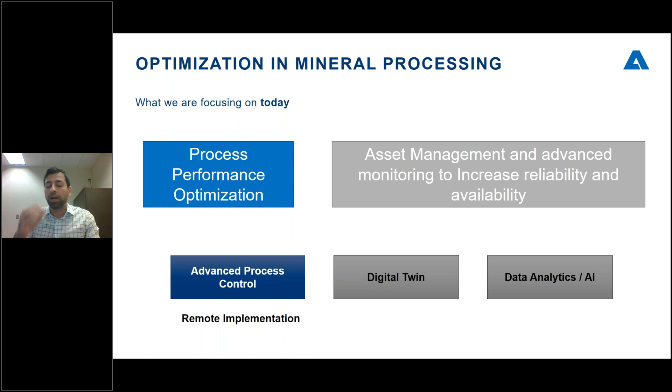Okay, so let's start with talking about our friend, the PID controller. I'm sure most of us have heard of the proportional integral derivative controller. It's everywhere, and rightfully so, because it's free, it's very easy to tune, very easy to understand and very predictable in how it behaves. So no surprises. And that's great.

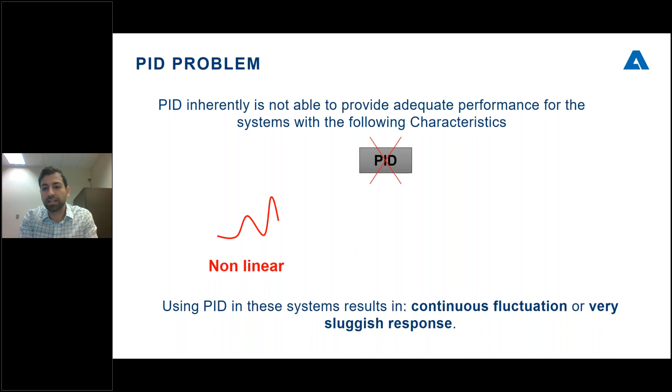But the problem with PID controllers is that on specific processes, there are inherent limitations. When the process is nonlinear, like thickener operation, for example. Or when there are multivariable problems, where control variables have influence on different process variables. For example, in SAG mill control, we have the feed coming in, the water, the particle size distribution having effect, and the speed of the SAG mill having effect on the weight of the SAG mill and on the throughput.

And also when there are big time delays, let's go back to our example on the thickener. When we change the underflow for the thickener and we increase the flow, then the density will decrease with a time delay, same as in the SAG mill feed. So when there are places like that, then we have a problem with the PID. And the problem is that when there is lag, the PID controller cannot inherently provide the optimum response.

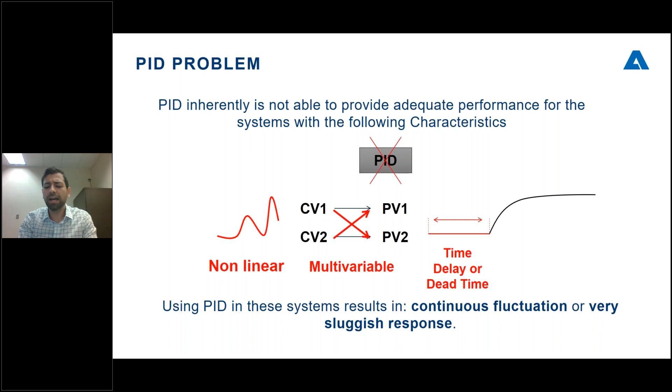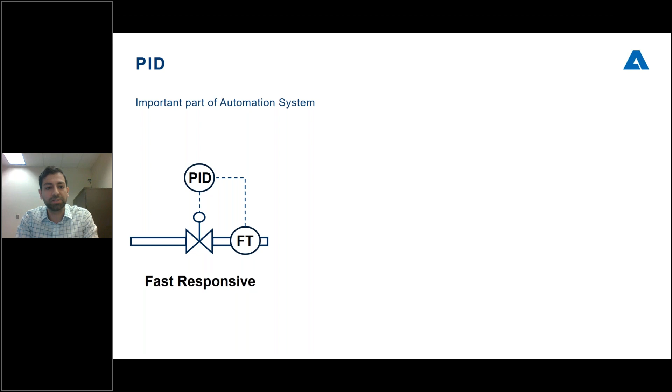Now, I never said that we just get rid of all the PIDs and have a different solution. There are places where a PID is perfect. For example, there are fast response loops like flow control, or places where regulation is not important, like when you have a buffer tank, or places where fluctuation is not important, when you have an analyzer for your pH and you have a mixing tank there.

So the places where fluctuation is important, and where there are inherent time delays or nonlinearity, those are the places where we need to have an alternative. And that alternative is the model predictive controller.

Now, the problem with the expert systems that you have heard a lot about through the last 30 years, that are available in the market, is that if you still have the PID controllers controlling those specific loops that are not suitable for PID control, and then you have a layer on top which does the optimization, at the end of the day you will end up with that fluctuation. You can't get away from it.

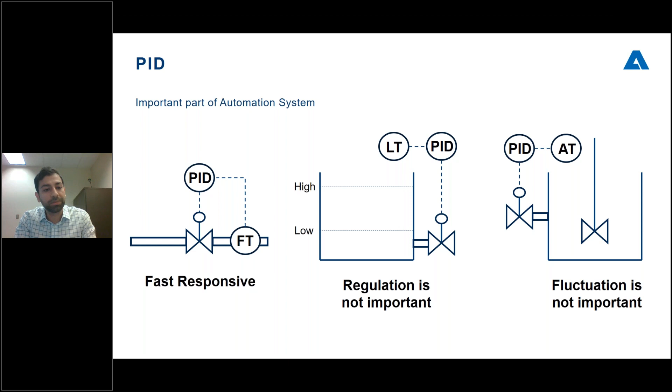And what happens is that the top layer for the logic, expert logics and all that, becomes more and more complicated because they are trying to go around the problem with the PID. And I will have examples for you later on.

So what we are proposing here is actually a hybrid approach. Let's stabilize with a multivariable model predictive controller in the specific areas where it is required, and then have the optimization layer on top that can work with that model predictive controller. And obviously, what we are providing in ANDRITZ is basically on top of that. On the same platform, we have the digital twin and plant-wide optimization. But today, we are not going to get into that area.

What we're going to focus on is each area, how we can improve the performance of, for example, the SAG mill or ball mill, hydrocyclone, flotation, thickener, or crusher. So what are we trying to achieve here? I'm sure that you have seen the graph on the left. Basically, variability is the reason that we cannot push our process to the optimum place.

For example, let's take the thickener. On the thickener side, we have a limit, and that limit is the torque. When we have variability on the torque, we can never go higher than the torque limit. And if we go higher, then we have to raise the rake. So what ends up happening is that on average, our operators will end up operating in the safe zone, which means they will go to a lower density for the underflow, or the level of the bed has to be lower.

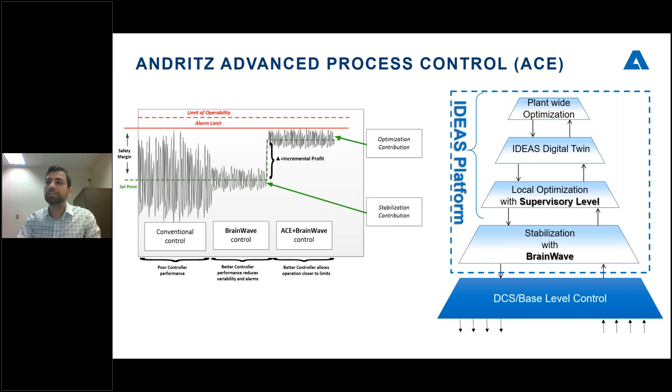So let's move on to practical applications and some results. For example, on the SAG mill, what are the problems? It's a multivariable problem. As I said, there's the feed, there's the rotation speed, there's water addition, the particle size distribution changes, and you're trying to optimize your throughput.

And you're trying to keep the weight constant at the right point that can give you the maximum throughput. Now, the problem is the variability of that weight can hurt you on the throughput, on that power curve. Also, the variability can make your power consumption very inefficient. So there's a lot of opportunity to improve with the SAG mill, increase your throughput, decrease your energy consumption.

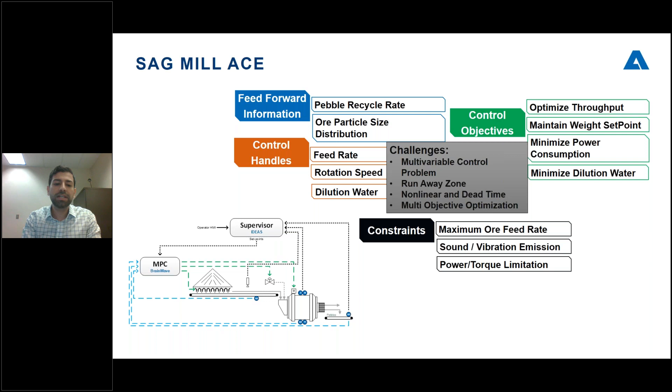And let's look at the approach of the model predictive controller plus the optimization layer on the top. I handpicked some of the results here for you. Some of them are from MLP; we can show it because there are published results, but the other ones I can't provide the name. But basically, these results are the comparison between the SAG mill advanced process control with the model predictive controller and the existing expert layer or expert system that was on the site. So that shows the improvement from even the existing.

So the production increased by around 3% to 4% throughput, and the energy save. Now, these results are drastically much bigger if there is nothing on the site. We've seen the improvement of up to 13% increase of throughput when you run the SAG mill manually, or you run it using the PID controllers only. And that is a big improvement.

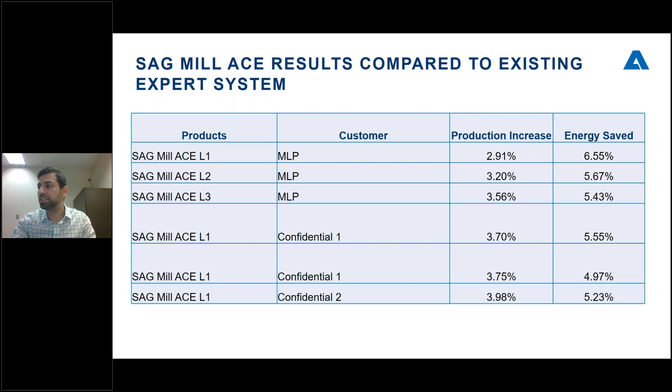So, the average that we see is around 5% to 10% improvement of the throughput when there is nothing else on the system. But if there is some expert layer there, then you can see the results of 3% to 4%, 5% improvement of throughput.

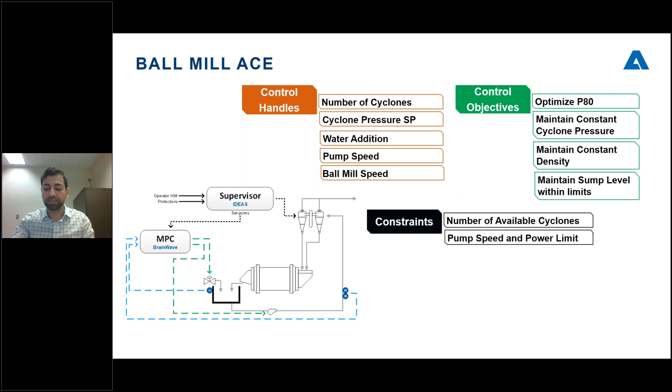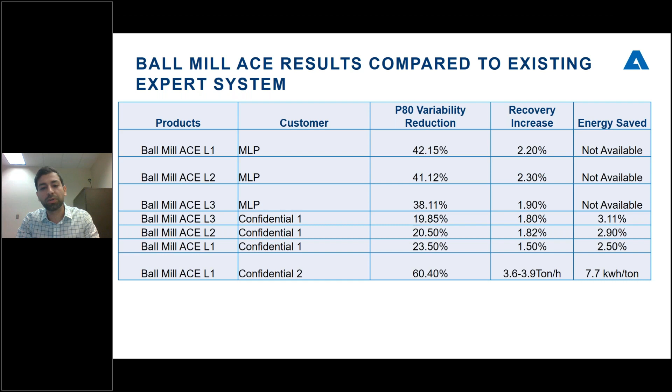So again, that's the problem with the PID. That's where we can use our model predictive controller with optimization and also the digital twin if we want to put it there. And let's look at some of the results there. So the recovery increase of between 1% to 2% is typical because of having the P80 fixed at a point that the metallurgists say is the optimum point. When we decrease the variability, then the metallurgists can look and see where is the best recovery. Also, there is a big energy save opportunity there as well.

The last one I want to share with you is the thickener. Obviously, the flotation and other places we can do, but I thought I'd also go over the thickener with you. What is the problem with the thickener? We talked about this a little bit. So, for example, we have our flocculant addition, we have our underflow, we have the feed coming in, particle size distribution changing, and we have 2 or 3 handles to just control that. There are big time delays, there is a big nonlinearity, and you use the PID controller there.

You hear a lot of times the operators say, take it out from auto, and you ask them why, and they say, oh, I can do a better job, or it's too slow. And then usually people might say, oh, let's tune the PID. It's not the problem of the tuning, because either you make the PID too fast, so it's responsive, and the variability increases, or make it sluggish, and then it just defeats the purpose.

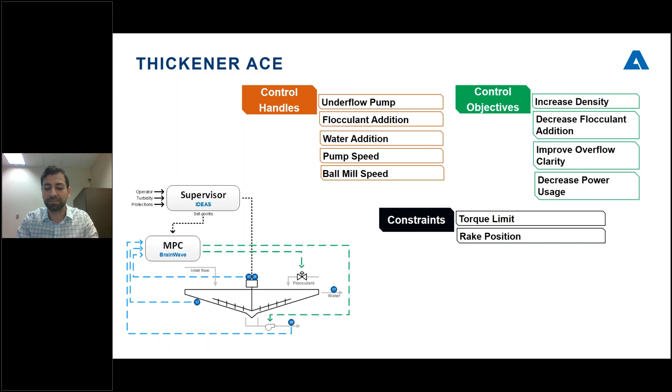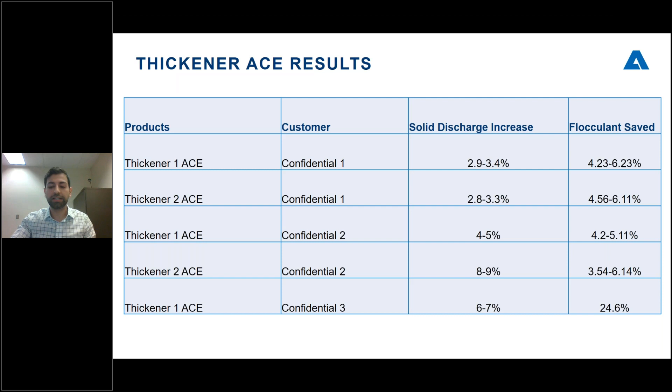So let's look at some of the results. Now, these results are not compared to the expert system. It's basically the results from the PID controller or the base level automation that is there, or manual. And we can see that we can increase the solid discharge somewhere between 3% to even 6-7%, and these are the percentage of the density. So, for example, from 52% to 55%, 3% there. And we have a lot of opportunity of flocculant savings, so depending on the application, 4% to 25% there. And depending if your thickener is on the concentrate or on the tailing, there are different strategies.

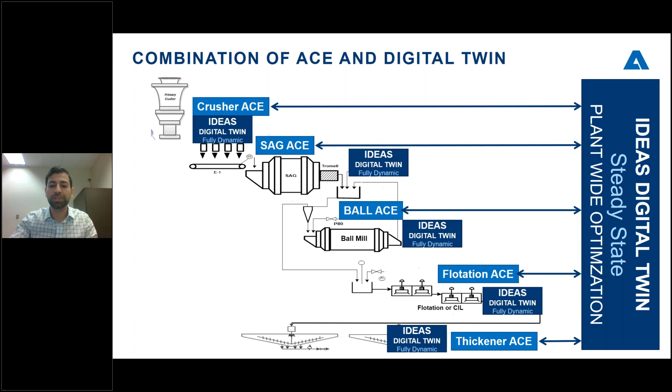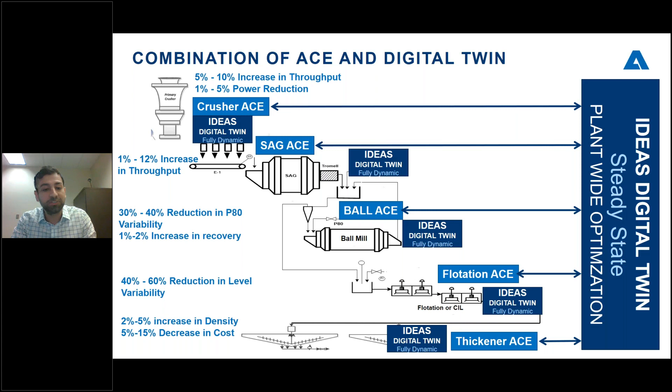So as you can see on the summary here, we can have each area with the advanced process control, digital twin, and expect to have improvement results: on the crusher, 5 to 10% increase of the throughput; power reduction on the SAG mill, we see somewhere between 1 to 12%; ball mill hydrocyclone, increase of the recovery, and so on and so forth.

Okay. As I promised, let's talk about implementation now. So usually these projects are around 4 to 6 weeks. And the steps of these projects are: we gather information for 1 week, and 3 to 4 weeks we do pre-configuration. Then we go on site, we do 1 to 2 weeks on the site, and then 2 weeks of remote monitoring, and look at the performance and handshake and make you happy.

But if you look, in the gathering information, 50% of that is usually done on site when we go on site for that. And then also site implementation, 100% of that is on site. The rest we do remotely. So let's address how we can overcome those areas doing it remotely.

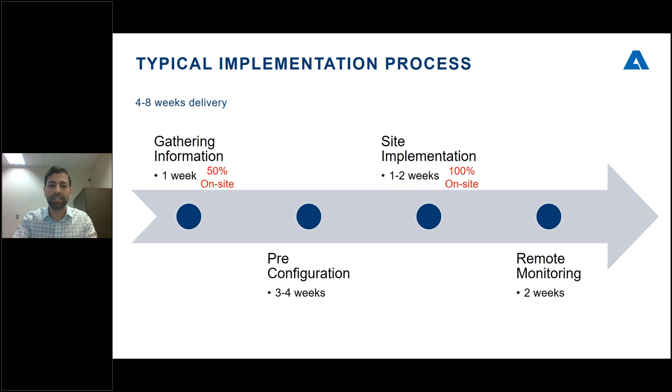So why do we go on site? Basically, we go on site to understand the physical reality of the mill. That's important because a lot of times we look at the P&ID and there are sensors there. There is some circuit design, and then when you go on site, when you start talking to the maintenance and operators, you understand it's a completely different reality.

Now, if somebody tells you that just by reading the P&ID they can design everything for you and know how your plant is working, they never set foot in a mineral processing plant. So basically we have to have that communication. We sit down and talk to the metallurgist, operation, maintenance, control, and understand the reality of what is happening.

How can we overcome that? Well, we then have to have a lot of remote meetings and be aware that what we see on paper is not the reality in the plant. Also, sometimes we look at the sensors, physically how they're installed. So we have to ask the site personnel to go take pictures, take a video. So that part we can overcome.

Then another reason that we go is establishing a personal connection with the champion on site. It's important because the success of each of these projects requires a champion who is actually from the site and takes the responsibility to make everyone buy in. And that champion is usually a metallurgist. So we need to establish that personal connection. Now, the good news of COVID is we are all learning how to establish personal connections remotely. So for that part, we need active communication and work.

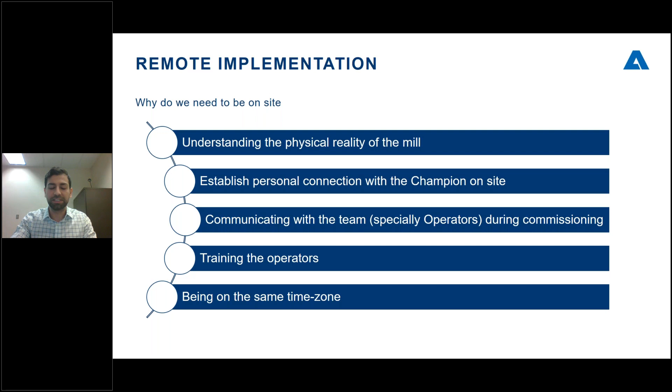But with a remote implementation, there will be obstacles, for example, the remote connection and the speed of that connection. That's so important. Usually in big companies nowadays, that problem is solved. They have a big IT group that allows you to do that. If that's not the case, there are solutions available like engineering in a box. We can send that, establish a very secure connection, and with satellite or other temporary methods, we can make those remote connections.

IT/OT cybersecurity obviously is very important. There are many different ways to address that. At ANDRITZ, we actually acquired a company from Israel, founded by ex-military cybersecurity officers, and now we are helping customers with cybersecurity. But many companies have their own cybersecurity, and that's not a problem, especially on a temporary basis. We can address that.

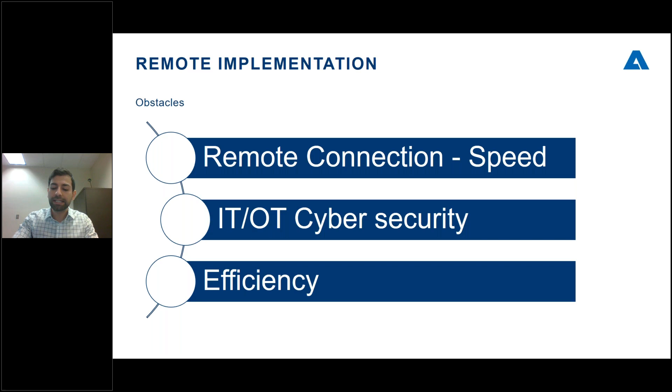Also, efficiency of implementing the project. That's the problem that I believe, because of COVID, we are now changing. That's the shift in culture I mentioned at the beginning that will help us make that efficiency happen. So what we see is that remote implementation of these projects, which bring a very fast return of 4 to 6 weeks, is completely possible. It requires the buy-in of you as a customer. And if you still have some people on site, those are the people we can work with. So it is completely possible, and we are doing it right now.